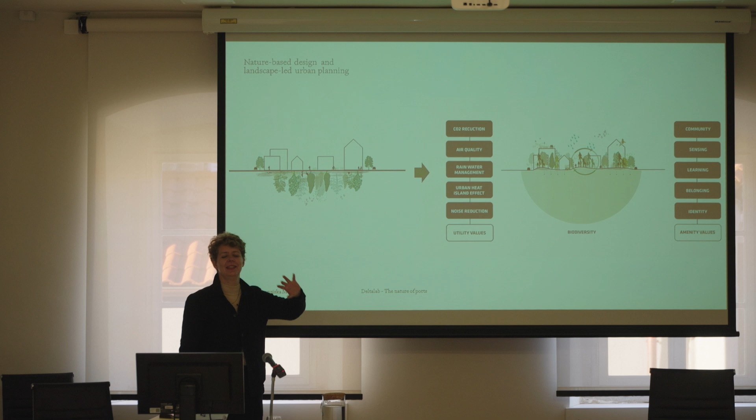For a very long time in modern town planning, we were kind of thought like this, and in Norway, that's definitely true - to think we have so much nature outside of our cities, let's build great cities, great buildings, really good infrastructure, and then nature can be outside of that.

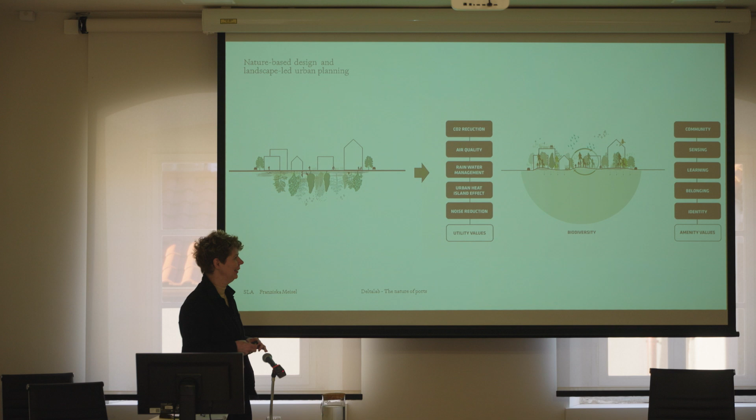I think by now, through the climate crisis and biodiversity crisis, we all agree that we need to use nature in our cities, and that we really need to integrate nature into urban planning, because there's so much value that nature can give us.

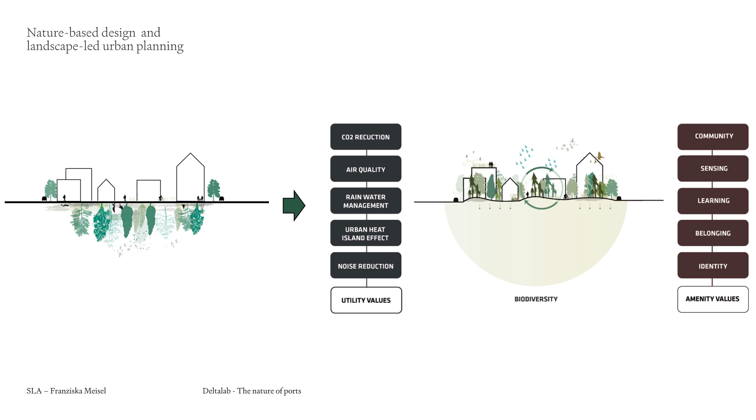There are utility values, obviously, about CO2 reduction, better air quality, rainwater management, and so on. And there are amenity values—the good things nature gives us as people—because nature can create a sense of place and give a pleasant identity to our cities.

Nature is good for us people. There's a lot of research showing that it shortens sick days, makes our creativity better, is good for mental health, and so on. So nature can do a lot of good things for us.

Nature also has many values in urban planning and creation, because it enhances economic value too. We see this a lot in our projects—well-designed urban public spaces with some level of nature really make market prices go up. That's what I tell my clients: they want to earn money, and I think we can use nature for that too. It's about earning money in the end, which is what the client wants, and it really enhances the project on many levels.

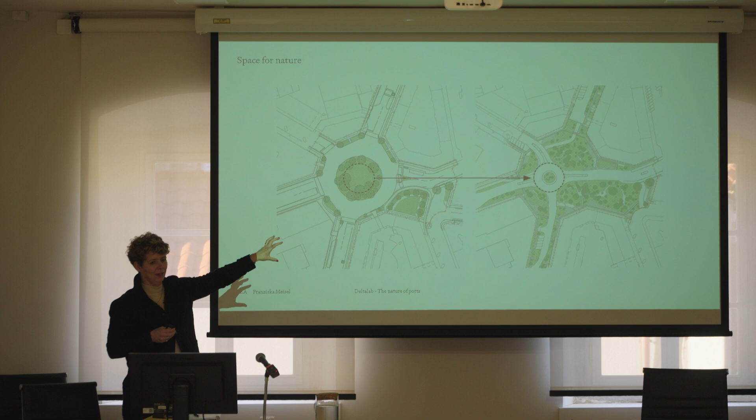It's still a road, still a roundabout, but before there was a green space in the middle that wasn't very accessible because of all the traffic around it, and the edge zone along the buildings was very small. We changed that, saying traffic maybe isn't the most important thing in the city—yes, it needs to be there, but we can solve it more elegantly, creating space for nature and also a lot of space for people to be in the city.

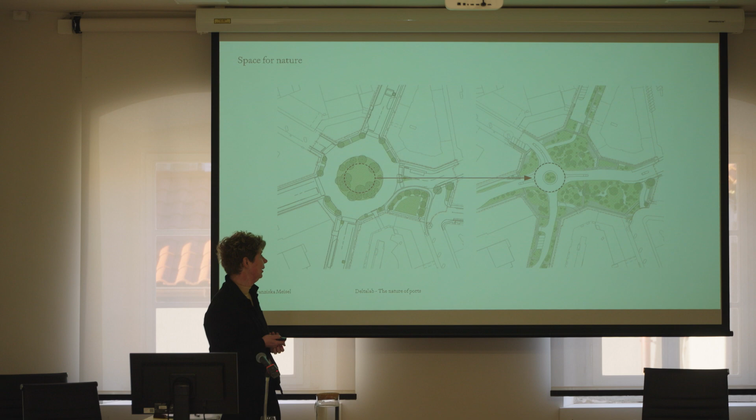So this is how it looks, and it's nice because you cannot fully plan this as a landscape architect. One of the best things about working with landscape is that planting 600 trees in a wild manner means it changes continuously—every time I visit, it looks different because trees grow and some die. There are some dead trees in the project that didn't survive the establishing phase; we leave them because they're great for insects, and it gives the whole project this new urban jungle feel.

This project really made it so there's a lot of people suddenly using this space, and traffic noise is filtered through the green, and the space really created a new identity for this neighborhood.

Before I come to Oslo, I thought it's fun to show we work a lot in other countries like Canada or the Middle East. It's nice to see a really big scale harbor development. This one is in Toronto, and I wanted to show that even when you work in very high densities, you can still, if you have the ambition and really push nature, you can do this.

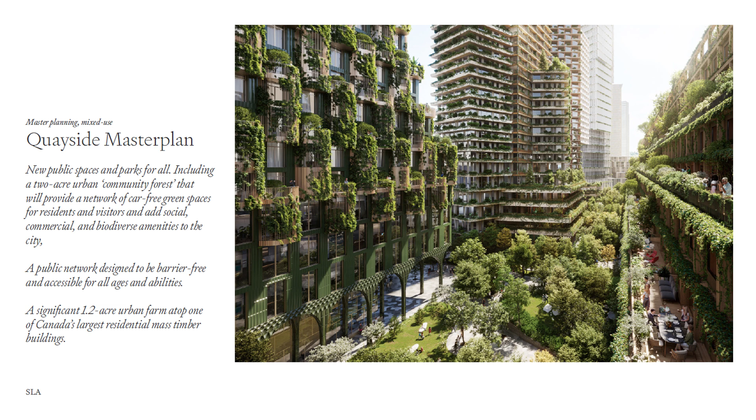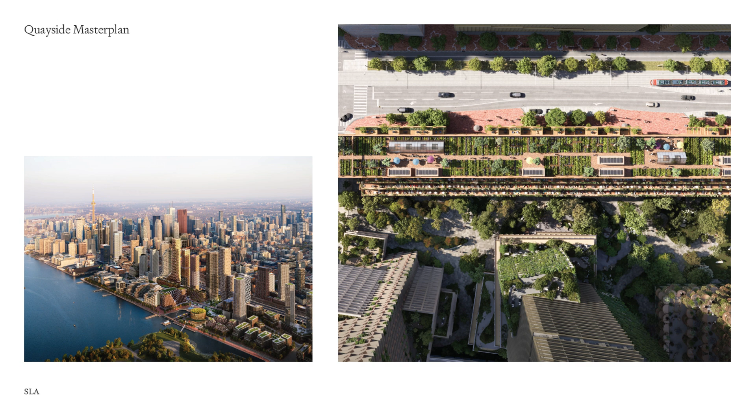Create this urban forest in this new density, really trying to take nature seriously. This is downtown Toronto, you see the scale. It's really big and amazing and different from what we are used to, but in a way we use our tools in all these different places all over the world, and the need for this nature-based design and our knowledge is really valuable to clients all over the world.

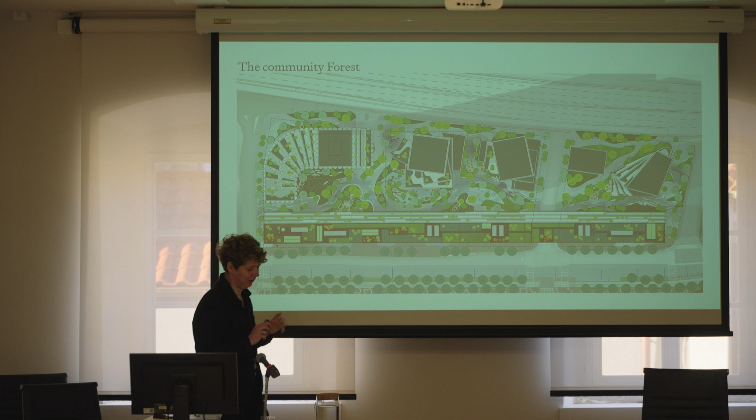So you see it's this kind of open, green, foresty space in between these high-rise buildings, and Toronto has a really harsh climate, not so different from Oslo. So this is also very much about microclimate and how the flow of the wind is channeled through the public space.

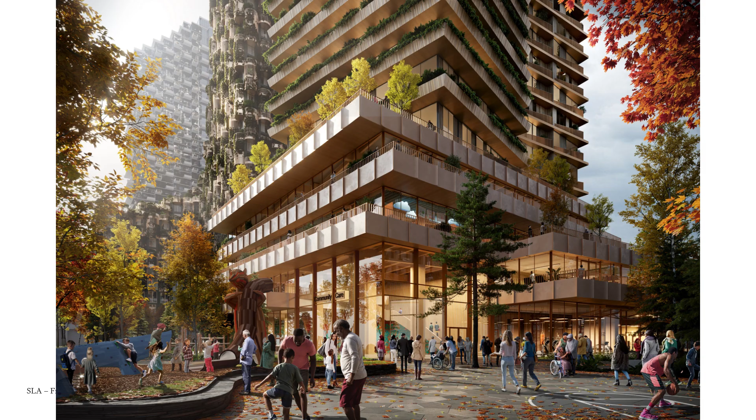And it's, of course, about taking nature seriously, but it's essentially also about creating good spaces for the people living there. So, water edges and nature parks.

I've been traveling in Croatia a lot, and when you start thinking Norway, Croatia, what's the connection? Norway has a really long coastline, a lot longer than the Croatian coastline, but it's kind of similar - this kind of coastline that goes in and out, with all these islands, and also a lot of old harbors that need transformation or that are in continuous development.

I'm going to show you 3 projects. One is in Trondheim, then obviously Oslo, Bjørvika, and one is very close by to Oslo. These projects are all about nature. In Norway, we have a lot of weather, so nature could also be rain and wind and harsh climate - not always the lush nature that we'll see in the project.

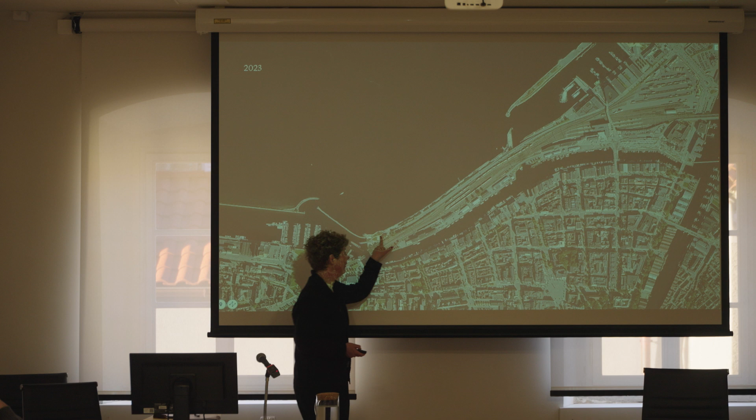But there's one important thing, and this is our design here. It's a harbor front that we designed, and that came into being because some of the infrastructure was reconfigured, and the state road department had a competition on what to do with the waterfront. This new waterfront, in a way, is a way of inviting people back to the water and also trying to connect this neighborhood with the new developments in the north.

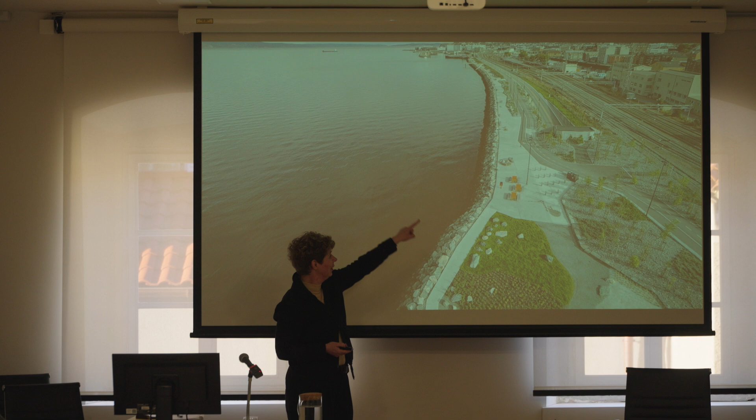So it's a very tiny strip that's being done. You see the road that was changed and partly put in a tunnel, which created the opportunity to create a broader space. It's really this kind of concrete strip that we did that people can use walking along the waterfront, and then there are tiny places where you can go for a swim and so on.

It's, of course, a lot of weather, so it's also a lot about wave protection and so on, so it needs to be very robust and sturdy. It can be flooded, obviously, the space. So design is really about creating robustness, but really giving this new opportunity to people. And suddenly, you still have the train, you still have the street, and so on, but it really at least enables people to walk along the harbor edge. And I think that's important.

And it's really designed with local material, taking this local identity and local climate seriously. A lot of the stones that are in the project came actually from digging out the tunnel for the road. So these stones were then placed in the landscape design and reused.

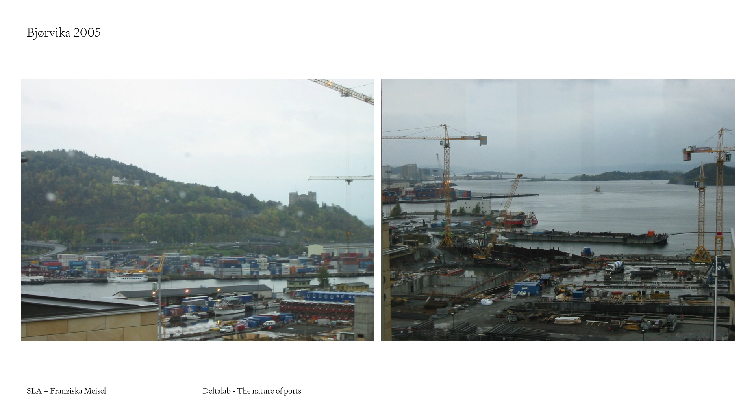This is how it looked when we started the project. We did the competition in 2005, 2006, so I found it in the office. I thought it was really nice to see it, no? When you see the nice images. But this, what it really was, was a harbor area. It was really grey, it was not accessible at all. Looks a bit like Rijeka.

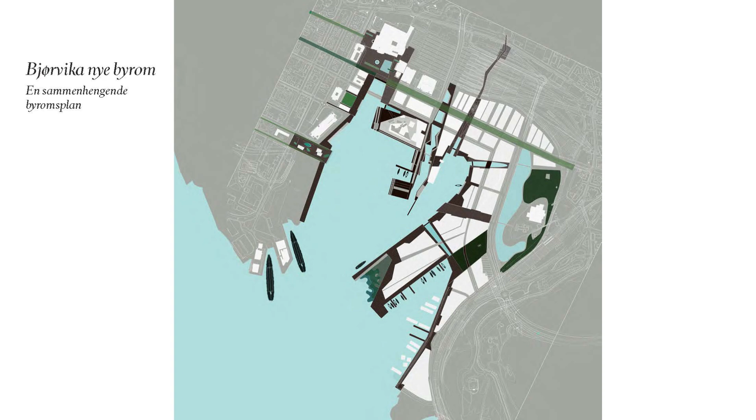So this more or less is what the competition plan looked like, and it's really kind of, as Alan explained, this fjord promenade, so you really can always go along the water edge. Together with that, there are these city rooms, and what's nice about these public spaces is that they are, as you see, quite long, and by that the second row of houses is in a way also connected with the water.

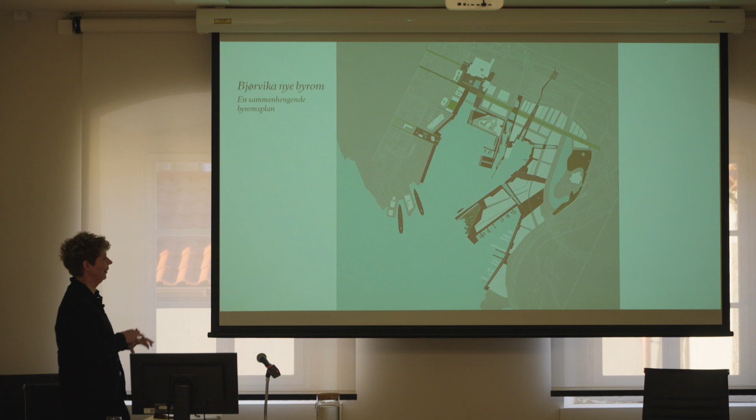I think that's basically, if you would talk about the essence of this plan, it's really these two things: it's a promenade and then these long spaces connecting a lot of the built volume with the harbor front.

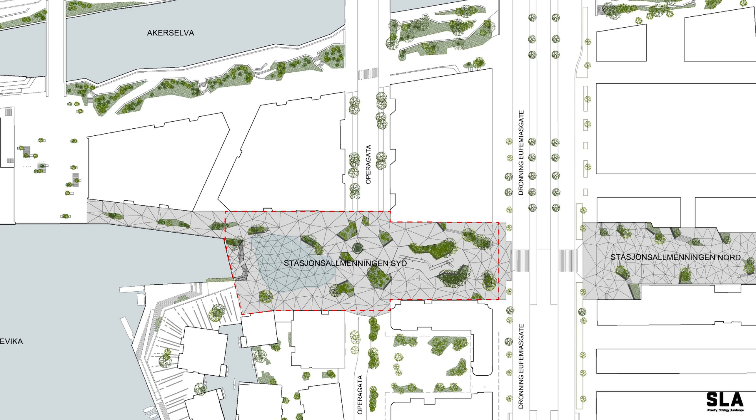You're crossing, not everything is built, but it's there now. It's like you're crossing the railroad tracks on this bridge, and then you start in this space. So the railroad tracks would be here, and we built this like 10 years ago in the barcode. It was one of the first spaces, and then this came almost 10 years later, which looks like this.

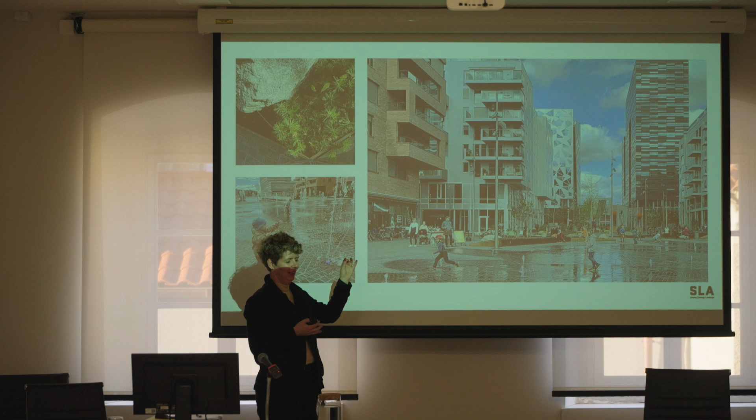You see the barcode in the back, and it's really a bit what we talked about. It's not so much about giving a lot of space. These spaces are really quite small, but they are designed very, very carefully. In one sense, you could discuss this kind of commercialization about the ground floor, and it's very curated, agreed, but there's also something really good in Bjørvika that the inside and outside, they really are connected.

It's of course nice to have a bakery here in the corner, and then you have this playground for the kids, and you can sit with your coffee and watch your children play. So this kind of curated city floor also makes it so well used, thinking this inside-outside connection together, I think it's often very important.

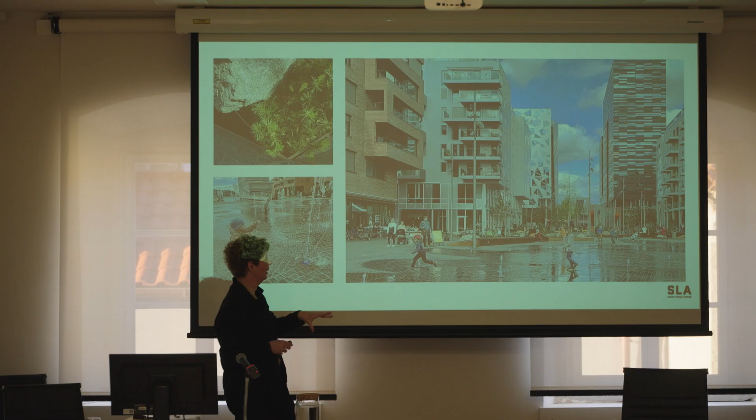What also works nicely about the space is that there are all these kinds of different playful elements. I mean, they look good, but they also enable kids to play, and you don't need to buy a coffee to be there. You can also just go to the playground.

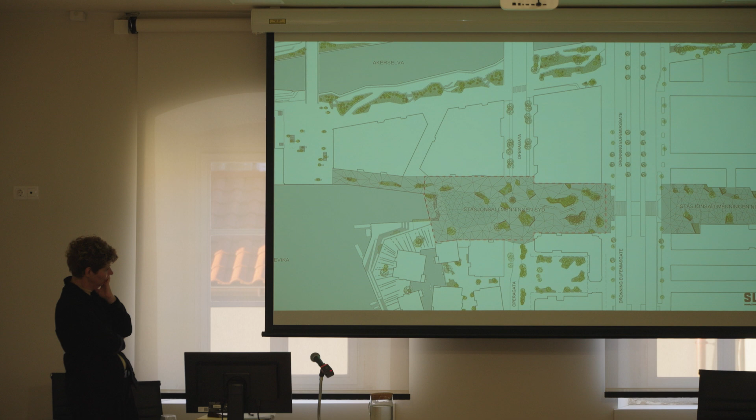First of all, the commons were in black basalt stone, and the streets were in light granite. So the commons got the sort of domineering role through these spaces, and you used this basalt, broken triangular basalt slates, to manage the whole 7-meter drop without you knowing it.

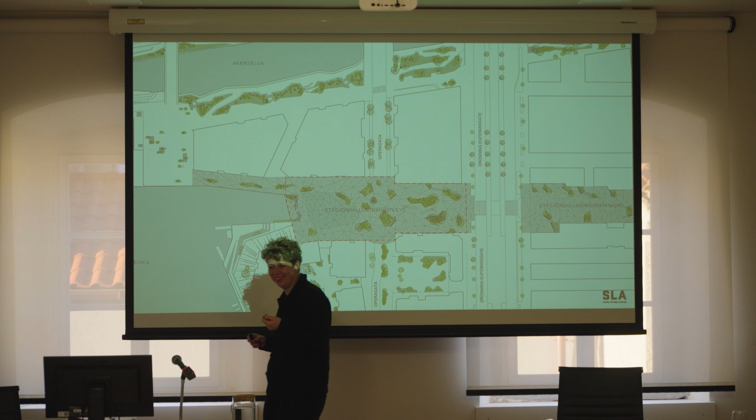Yeah, so in this design it's a long ramp, and if you need it, you can use it, but you can of course just go steep, no? So there's no railing. It's a 3D mesh. Yeah, it's a 3D mesh.

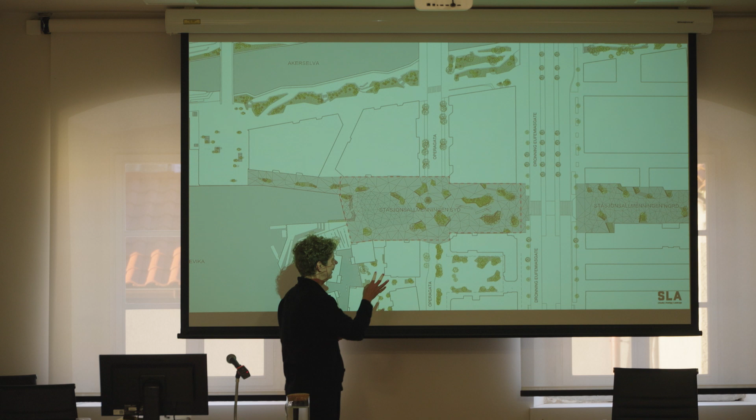What I said about the trees, I think it's an incredible story. Because of monument protection and these view lines, you see quite clearly this kind of development in thinking about trees in the city, because in the first part we really had to push them towards the facade, so you still have this kind of view line, and then later everyone understands, yeah, maybe it's nice with trees anyhow, so we were able to put them a lot more centrally into the space, which also allows us to create these different zones.

While this might be a terrace, this is like the central play area and so on, so it really creates different situations to be used. So here you see it a bit from above with the central playgrounds, and of course the trees still have to grow to be really as big as in the old collage.

What's really been wonderful is continuously working on these different spaces, also as a practice, because you also learn by doing it. It's such a long-term project, you also kind of reflect, and okay, some solutions maybe don't work so well, and then you continue to design.

This is one of the central spaces, the opening of the river, creating a water edge into a much more lush promenade, dropping the levels. This area might flood - we've seen that happen a couple of times, so the planting is chosen to survive it. Sometimes when the wind blows, seawater gets pushed into the river and it gets quite flat. But bringing the level down means you feel much more connected with the water, creating lush, diverse niches for people to enjoy the sun - even in the center of Oslo, a moment in nature.

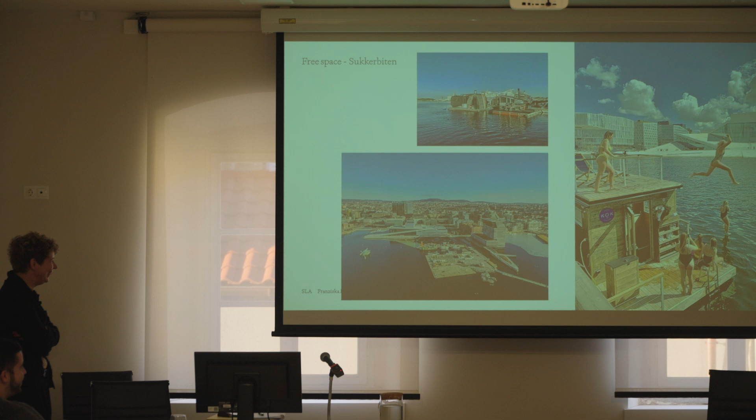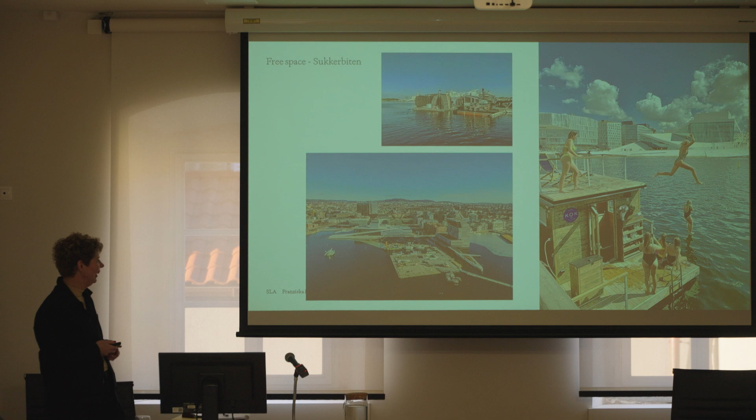Looking back on this plan after working on it for so long, there's something about these free spaces that weren't really planned. Twenty years ago no one thought crazy people would come with their saunas, or that swimming and this kind of informal activity would play such an important role. It's lucky that throughout this whole development there's still this space with a lot of discussion, still not decided what it will be - creating a space of opportunity, the last creative resort in this plan. We actually zoned it for experimental and temporary buildings.

But then when the big political strife was about the museum, when we reformatted the plan for approval, we had to give the harbour authorities something, and there was supposed to be 3,000 square meters of something there. Afterwards there's been a lot of civic society engagement to keep this as it was eventually. So we have a zoning tag named experimental - we could just call it land use temporary activities. But there's been a lot of debate, should it now become a park, should the photo museum go there - at one point that was in discussion.

In a way, maybe that's what it always should be - this kind of space for experimentation throughout this commercial development, to keep a space for people to do something else and to experiment. Another thing is this urban farming project that came in as an art project, but also showed a different way of using the city and what kind of value you can create by placing completely different functions, giving people space to engage differently in the community.

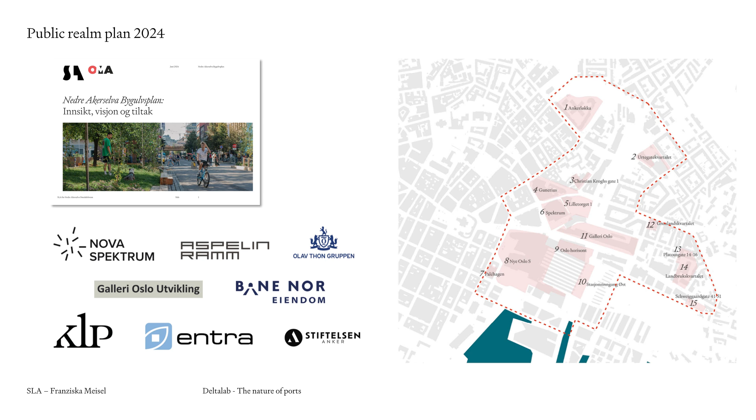I wanted to show you this because I think it's an interesting tool for development that we're experimenting with in Oslo right now. We just released a public realm plan - there are a lot of developers in this area. All these red marked building blocks are redevelopment projects, some with high rises, a lot of money being put into this area, people trying to redevelop and earn money. Some of them are here - these are our clients.

And what's interesting in Oslo is this so-called Områdeforum - it's like a contact forum for the developers. The developers come together in a shared group and start to discuss larger areas together. This is amazing because the projects could look like this.

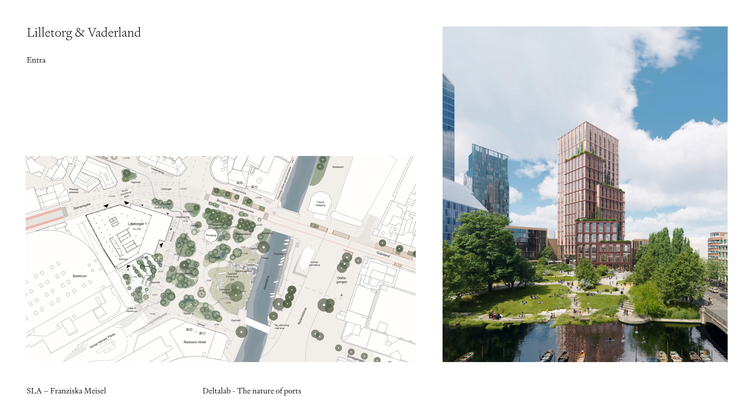Like high-rise buildings and so on. So I'm not going to explain this project in detail.

What's really interesting is we started this dialogue with a developer group. They invited us to serve as part of the dialogue. The first thing we did was map all the projects in the area, and by doing that, of course the projects always take up a bit of public space in the redevelopment, but they never quite match. There's always space in between that no one thinks about, so it's not part of the regulation.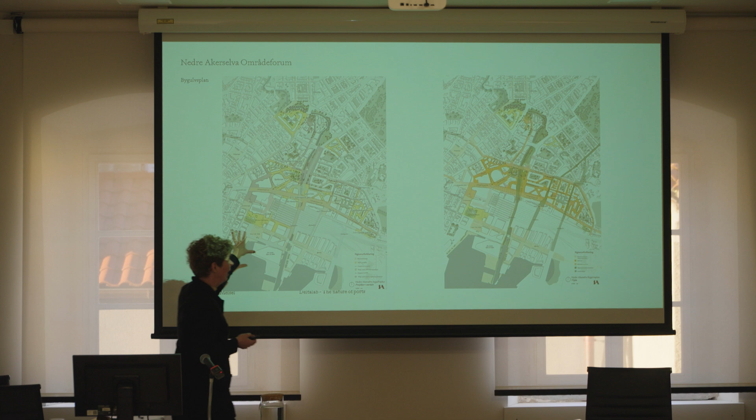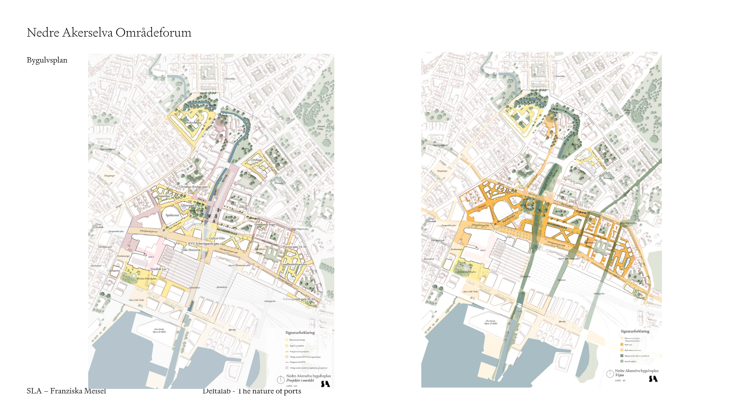So from mapping, we started to discuss, okay, what is the vision? What's the long-term vision? Like in 2050, maybe we have this central urban space zone that is redeveloped and so on.

I think in Oslo, Bjørvika was very visionary. They took down all this big infrastructure, dug the tunnel, made a visionary plan, and executed it.

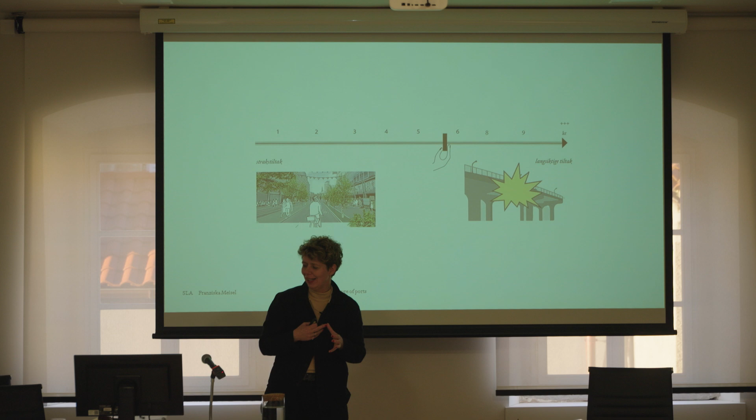North of the railway station, we are very stuck. We're stuck with a state road department that doesn't really want to break down the bridge. We're stuck with the railway transportation system that doesn't want to change anything because it's very costly. So it's very, very slow to make big plans.

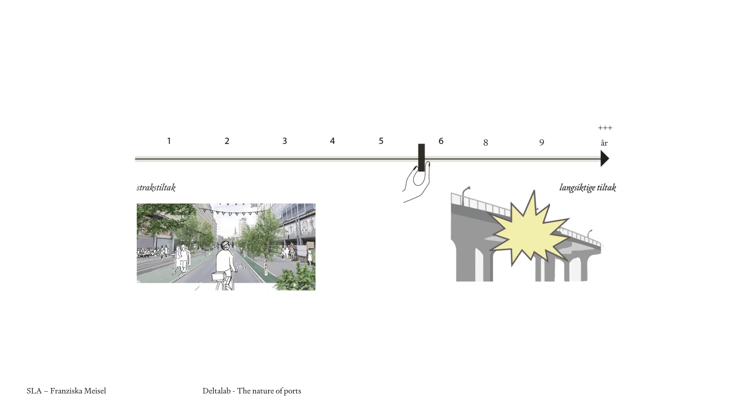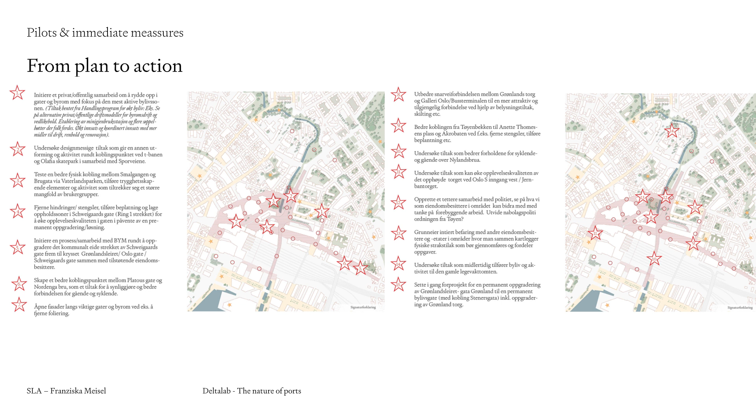So what we discussed with the developers is, okay, but we cannot wait. It's also a very complicated neighborhood, with criminality and so on. We have to start, we have to do some immediate work and just get going with the area, turning this from plan to action, to really get going and try, in a very different way, to develop this area together.

It's really, at least time will show if we succeed. I really hope that this is also a good model for transforming an inner city area, definitely when you're not really able to make these big visionary plans.

This was two weeks ago - one of the developments where people said, yes, this is a good plan, we do understand, and we want to engage with the neighborhood.

They did an event and an art installation, starting to transform and pilot a park that has a lot of criminality and is very dysfunctional, trying to take it back and give something to the neighborhood, trying to engage and make it better. We don't know if it's going to work, but I think it's a great tool to pilot and test things and get going. Sometimes it just needs these small interventions.

Which brings me to the last project, which is also a harbor transformation. It's really this infrastructural old harbor area where we are testing a somewhat different development method with our clients. This is a picture in winter - the old cranes and the old warehouses and so on, it's all there.

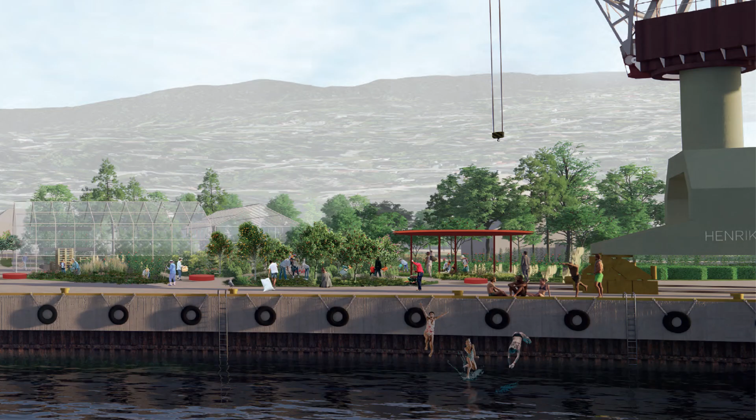This is where we want to go - keeping the industrial heritage, yes, but also giving it back to nature, giving it back to the people in Drammen.

Drammen, by the way, is about a half-hour train ride. It's not so big a city, but it has a relatively industrial identity, I would say. It's basically where, not so long ago, maybe even still now, all the cars imported into Norway arrived here to the port before being sent further on.

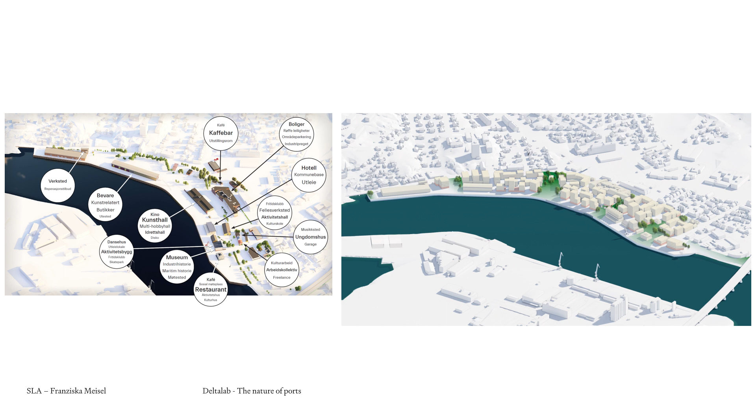So you see, this area is relatively big. It has a lot of existing buildings, old industrial buildings.

Of course, the developers want to earn money, so in the end the goal is this - it's about building houses and earning money and so on. But it's also really about transforming it into a new neighborhood.

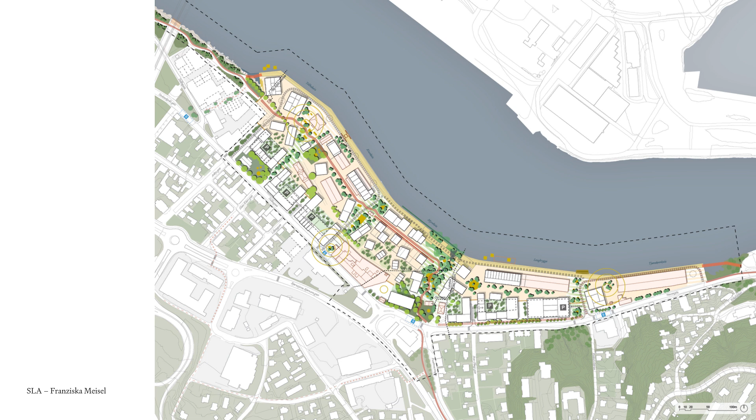And the master plan maybe could look like this - we don't know yet for sure. The master plan is developed through a communal development organization and a private owner, so they shared forces, which is very nice in this kind of early-stage process.

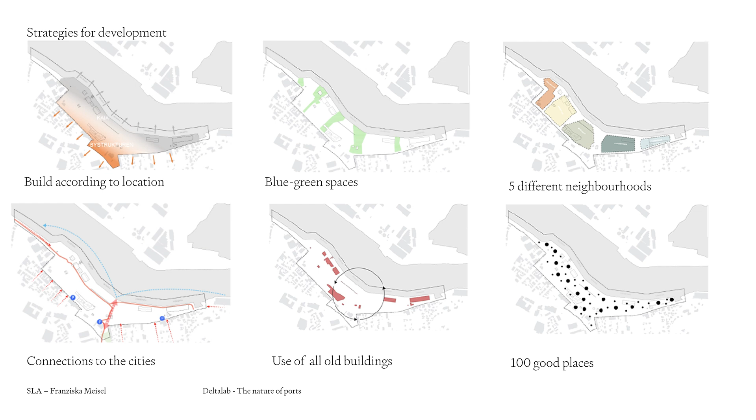And then of course you can put strategies into this - there should be blue-green spaces, like we've seen in Bjørvika, connecting to the water.

Maybe there could be different neighborhoods. We could try to reuse all the old buildings. We could make a good infrastructure and good connection. But it's in many ways also about creating 100 good places. This is a bit what we do and why I think this project is interesting to develop.

Yes, you can have all these ambitions, but how do you actually get there? We do that through this co-creation process, really engaging with the public, preparing the site, and ultimately reaching a sustainable urban development. By doing this, everything we learn loops back into the master plan, so it's not fixed at all. It's a very different way of developing compared to Bjørvika, where you had this great plan from the beginning. Here it's really about testing, learning, engaging with the public.

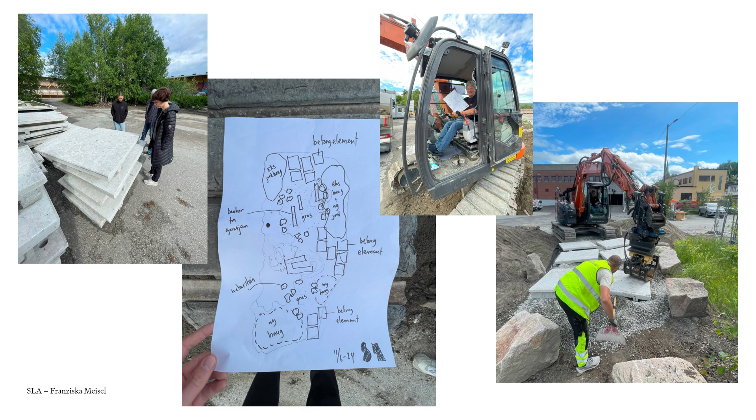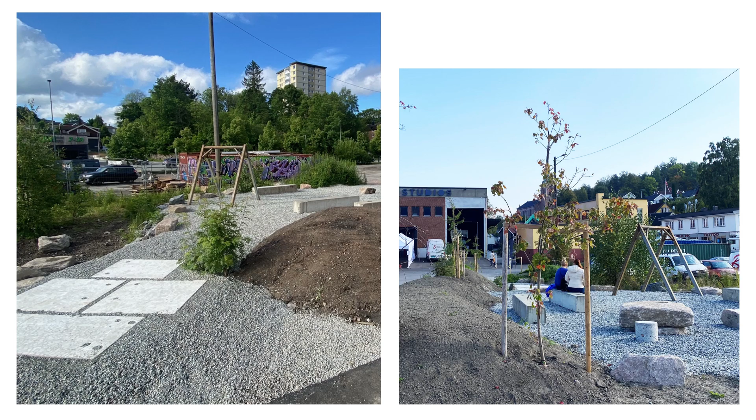And we do a lot of this, trying to take this big infrastructure place back, already from the start, before the master plan. It will take more years to have a final regulation, but already now we're trying to create something and learn out of this, trying to give something back to the neighborhood, creating a new identity for the space - what can it be in the future?

And engaging really, for example, with a local school class, making them plant tulip bulbs that will flower in spring, and maybe then take them back in spring to look at the flowers, look what you created, and engaging, learning - we as planners also learn a lot through these processes.

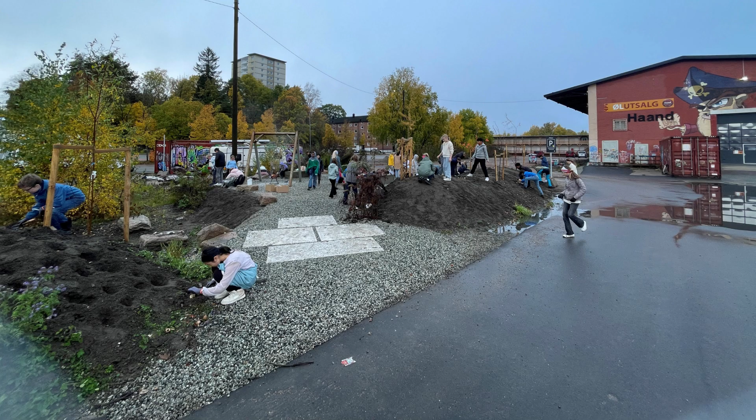It's super fun to do. It's also really nice to do this kind of project. I think as a designer it's sometimes very healthy to go out and dig and not only draw, because often these things are just drawn on a small sketch and then you go out and create. I think that's very healthy, to see what you actually can do with the space.

So we like it very much, and I do believe that in times of economic uncertainty and big world problems and so on, maybe this is also a way to do urban development a bit differently.

So to sum it up, it's very important that it's all about collaboration and talking with different stakeholders, trying to connect. For me, it's really about testing - test and start, let's just get going. Let's not just wait for big visionary plans, maybe that's never going to happen. Maybe it's easier to make small interventions, testing things out.

And then this one is important: there's always space for nature, if we prioritize it. If we don't only think about infrastructure and so on, everything that needs to function in the city, but if we really prioritize it, I believe there's always space for a tree somewhere.